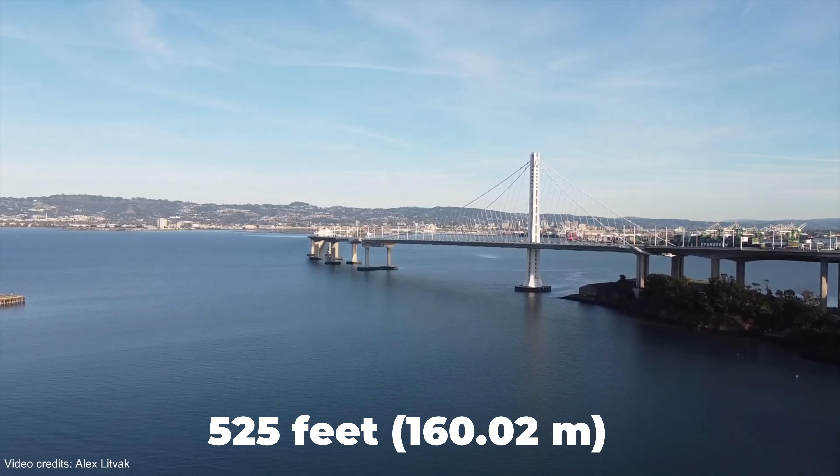California spent $6.5 billion on a single bridge, and it's impossible to miss. That massive 525-foot white tower over San Francisco Bay. It took 11 years to build, and it's the most expensive public works project in California's history.

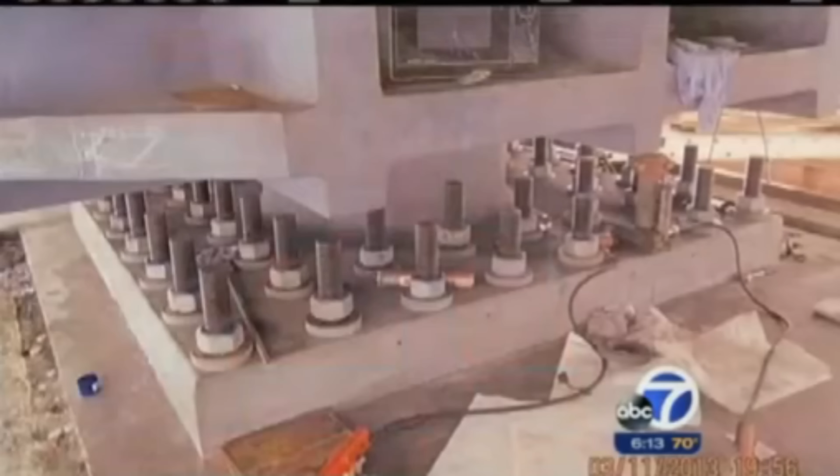But this bridge wasn't built for aesthetics. It had one high-stakes job: to stay standing when one of the most dangerous fault lines in North America finally snaps. But here's the secret. Before the first car even crossed it, components specifically designed to prevent a collapse were already breaking. California knew, but they opened it anyway.

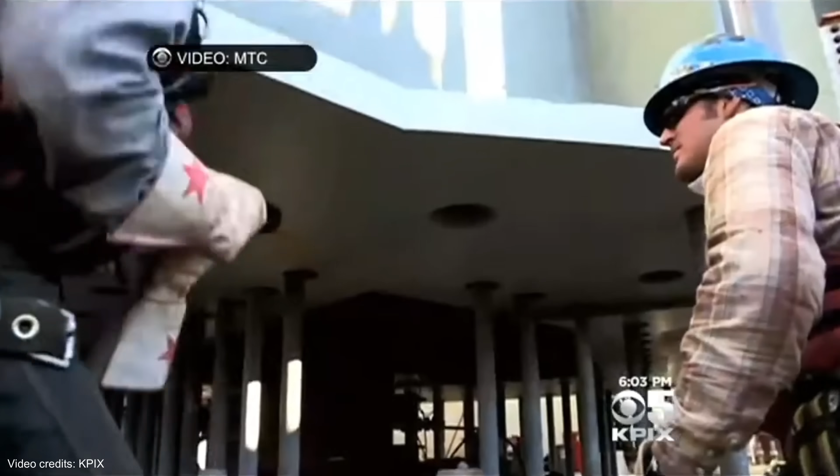Since then, the bridge has kept failing in ways no one predicted. This is the story of how the most expensive bridge the US ever built became a project California can't stop repairing, and the structural gamble that's still sitting right under your tires.

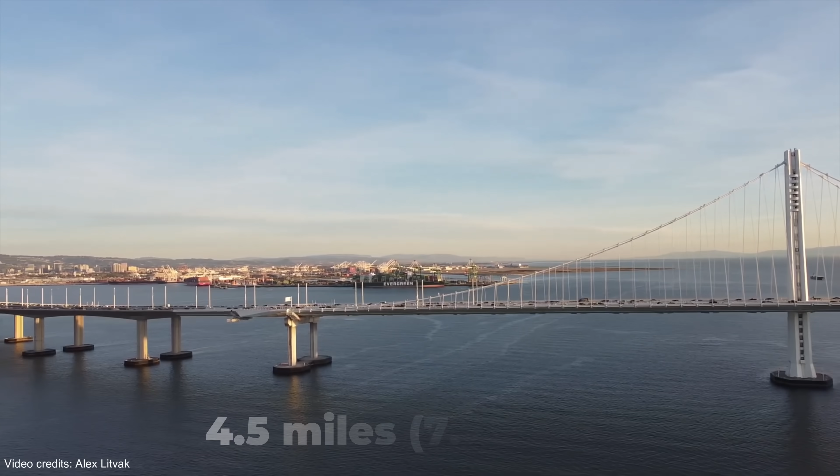Most people have heard of the Golden Gate Bridge, the red towers, the fog, the postcards. But the Bay Bridge is the one the region actually runs on. It connects San Francisco to Oakland across the San Francisco Bay, carrying Interstate 80, the main highway artery of the entire Bay Area. 4.5 miles long, 10 lanes wide, more than 270,000 vehicles cross it every single day. More daily traffic than the Golden Gate.

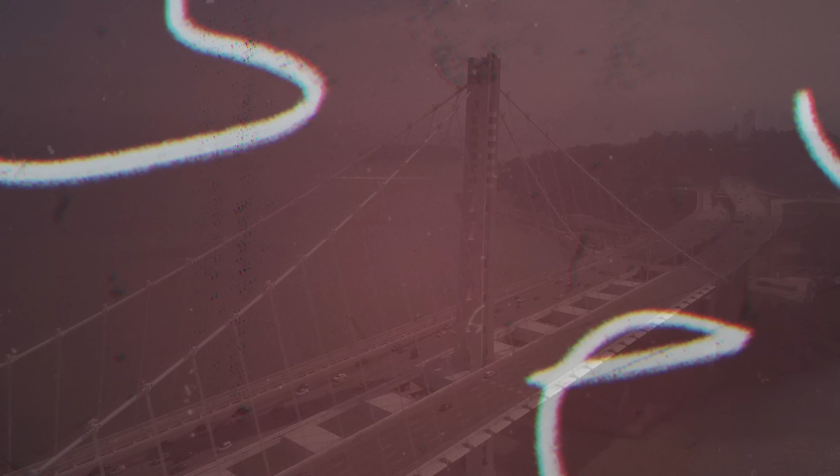The Golden Gate is the icon. The Bay Bridge is the lifeline. Guinness has the paperwork. It's the world's widest bridge. Here's the number that sets everything up. In 1992, engineers estimated it would cost between $150 and $250 million to seismically retrofit the eastern half.

The final bill came out to $6.5 billion, a 2,500% increase, enough money to build approximately 26 full-size bridges. California spent all of it on one span, 2.2 miles. And if you've ever driven this bridge, you've been part of that bill. Tolls went from $1 in the 1990s to $8 today. 30 years of Bay Area commuters paying for it, crossing by crossing.

The bridge has two halves. The western section, the old suspension span built in the 1930s connecting San Francisco to Yerba Buena Island, was retrofitted and kept. The eastern half, running from Yerba Buena Island to Oakland, is what was torn down and rebuilt from scratch. The single white tower you recognize in every photo, that's the eastern span. That's what this story is about.

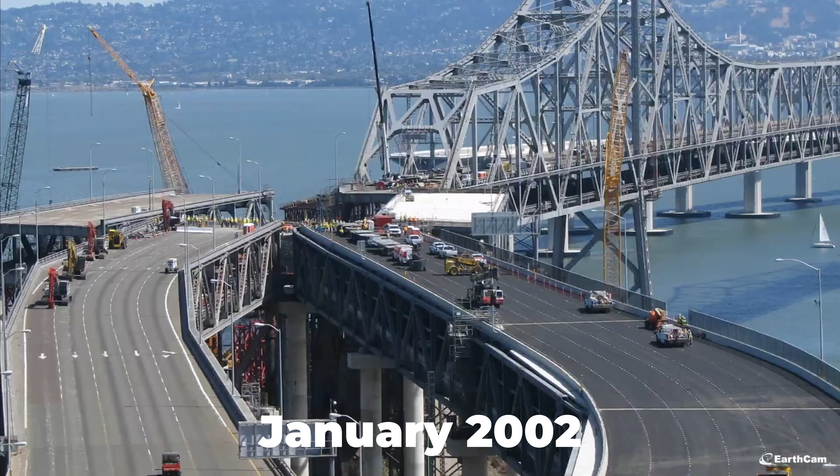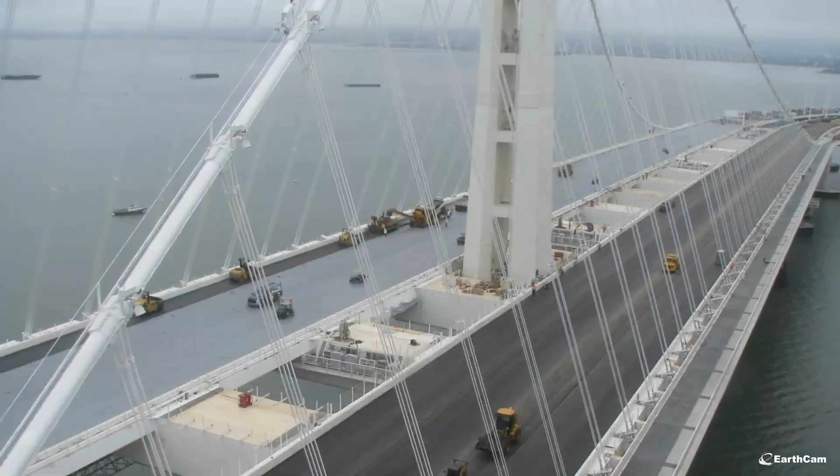Construction started January 2002. It was supposed to open in 2007. It finally opened September 2, 2013, 6 years late, billions over budget, and already carrying a problem that would not make the press releases. But to understand how a bridge this expensive could fail this badly, you have to go back to the night it all became necessary.

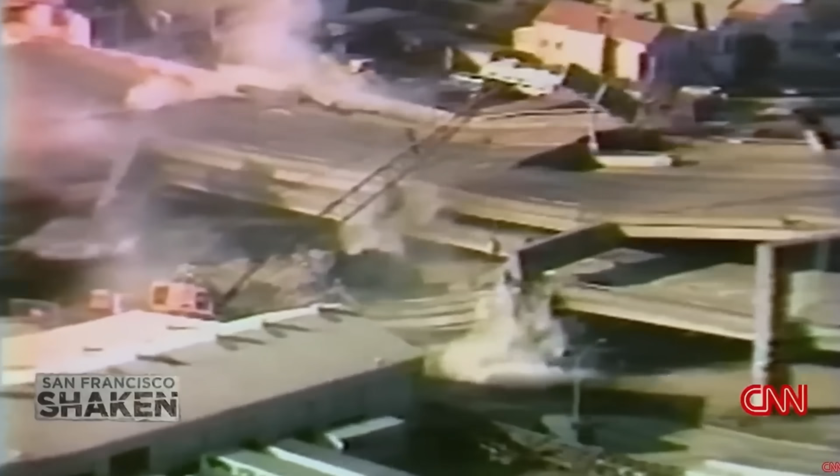October 17, 1989, 5:04 in the evening. The Loma Prieta earthquake hits, magnitude 6.9, epicenter 60 miles away in the Santa Cruz Mountains. Not even close to the Bay Bridge, but a 50-foot section of the upper deck of the old eastern span snaps and collapses onto the lower deck. One person is killed. The bridge goes dark for a month.

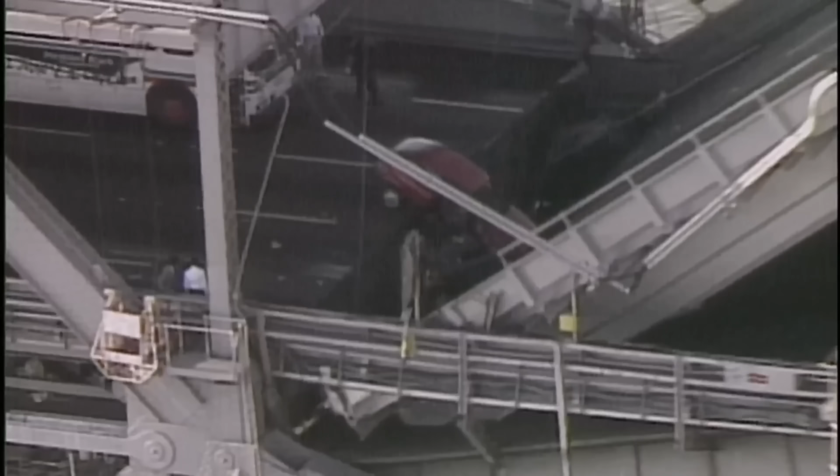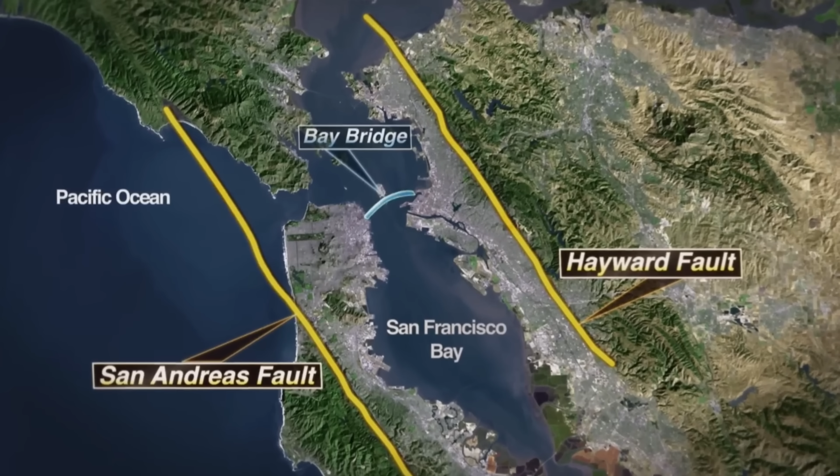But the terrifying truth came later. Engineers realized the entire structure had been seconds away from a total, catastrophic collapse. The Hayward Fault runs directly under Oakland. It's one of the most dangerous urban fault lines on Earth. In 1999, seismologists put the probability of a major Bay Area earthquake at 70% within the following 30 years. That window is still open.

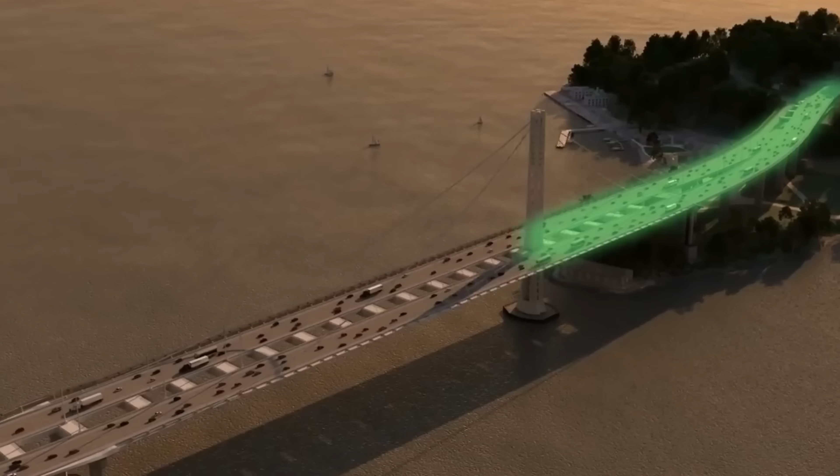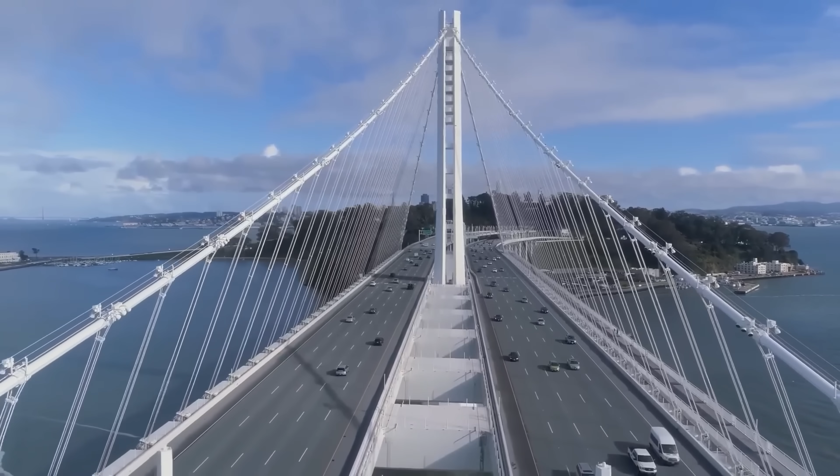The decision was about survival. Retrofit wasn't enough. The eastern span needed full replacement, designed to survive the maximum credible earthquake over a 1,500-year period and keep emergency vehicles moving within 24 hours of an 8.5 magnitude event. So how do you spend $6.5 billion building a bridge that survives the next earthquake and end up with broken earthquake components before it ever opens?

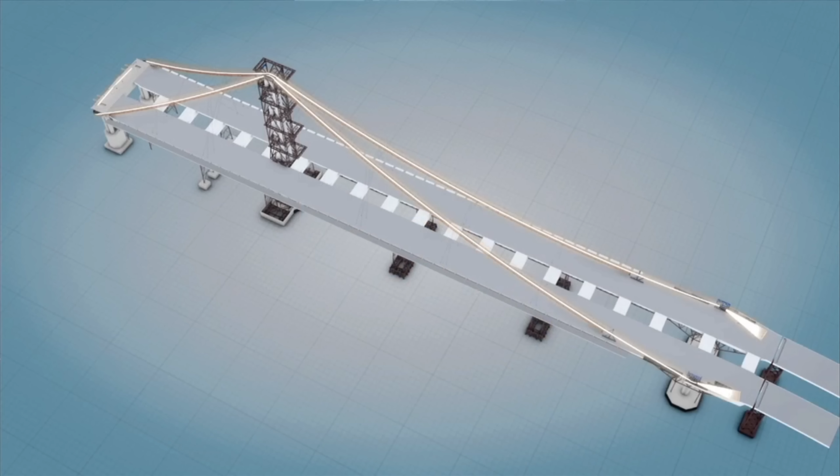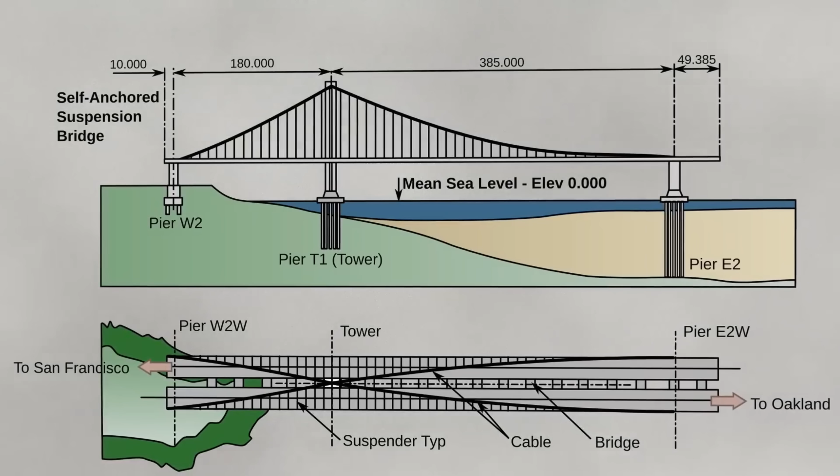The decision to rebuild was about survival. What happened next was about something else entirely. The new eastern span uses a self-anchored suspension design, or SAS, a single asymmetrical tower 525 feet tall. Usually, suspension bridges have massive cables anchored into the ground on both banks, but this one is different.

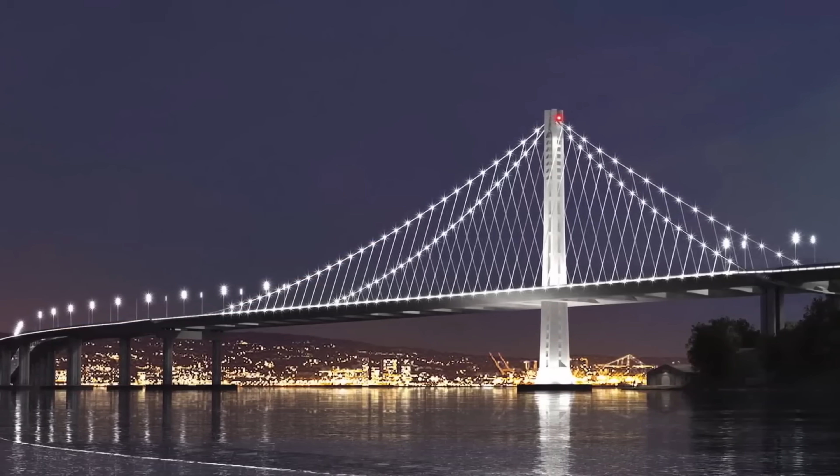The main cable anchors within the deck itself, so the deck absorbs all that tension through compression. It was a structural system that had never been attempted at this scale anywhere in the world. When it was finished, it was officially the longest single-tower SAS bridge ever built.

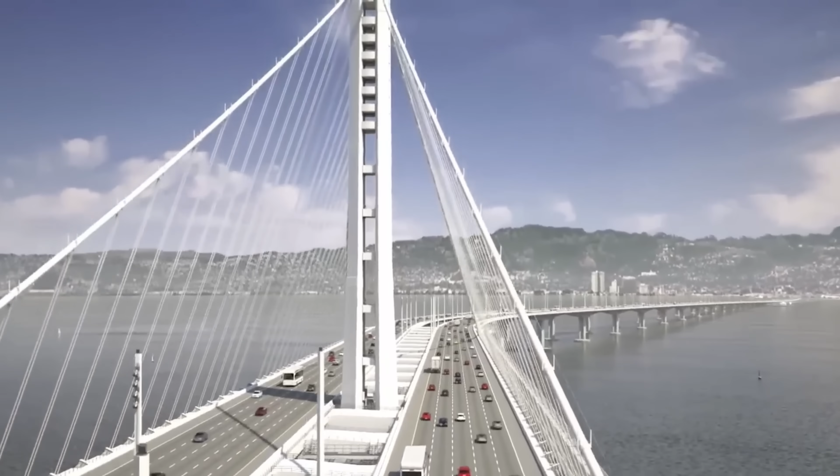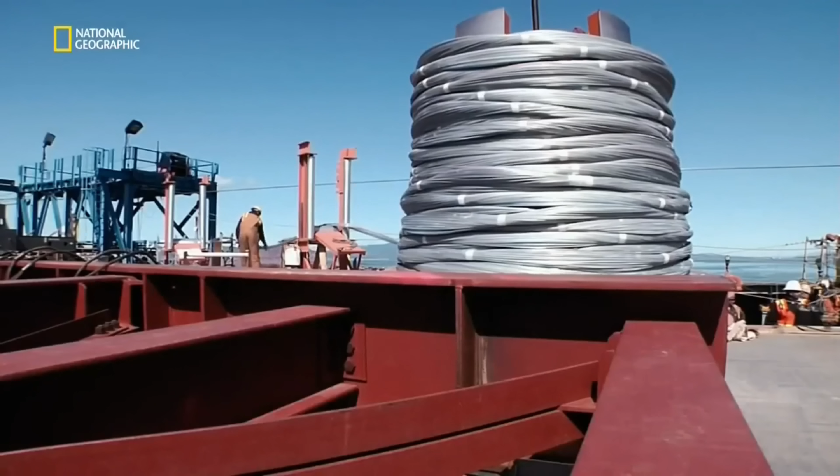The main cable alone is made of 137 prefabricated bundles, each nearly a mile long, over 17,000 individual steel wires weighing 10.6 million pounds total. Why go experimental? The Oakland side geology was a problem. Deep bay mud made traditional anchor blocks enormously expensive.

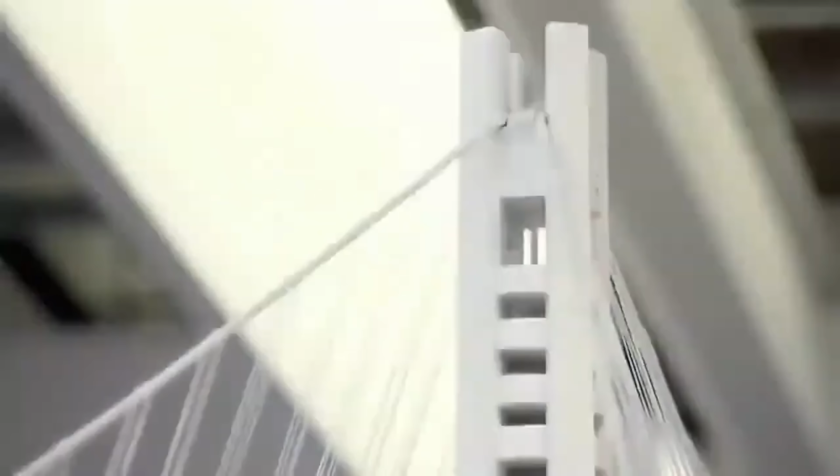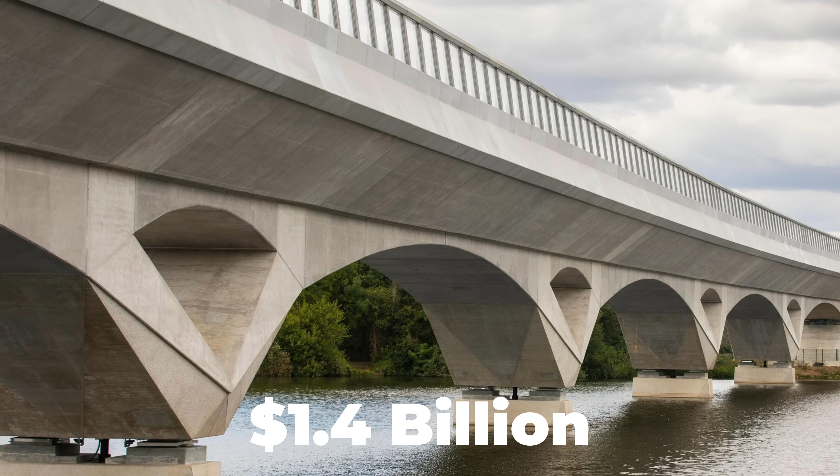In 1998, this design won a public competition. People wanted a landmark. And that's where Governor Schwarzenegger enters the story. The original plan was a straightforward concrete viaduct, $1.4 billion, safe, functional, and totally unremarkable. Critics called it a freeway on stilts. When Schwarzenegger's administration took over, the push for an architectural statement hit high gear. The SAS tower became the centerpiece.

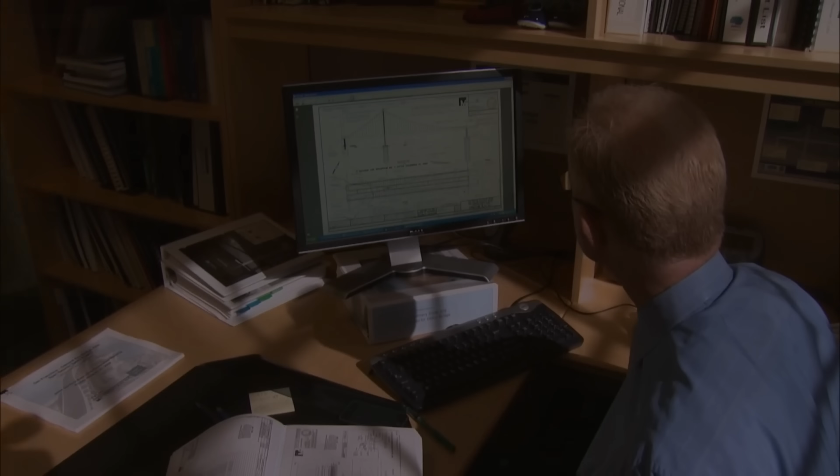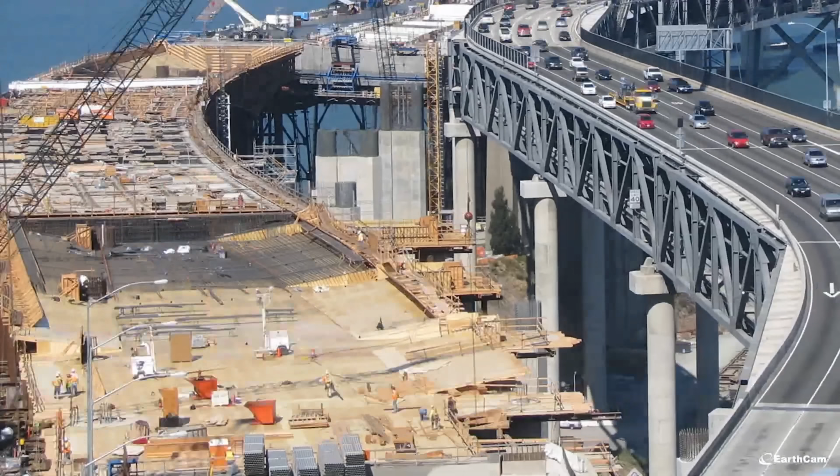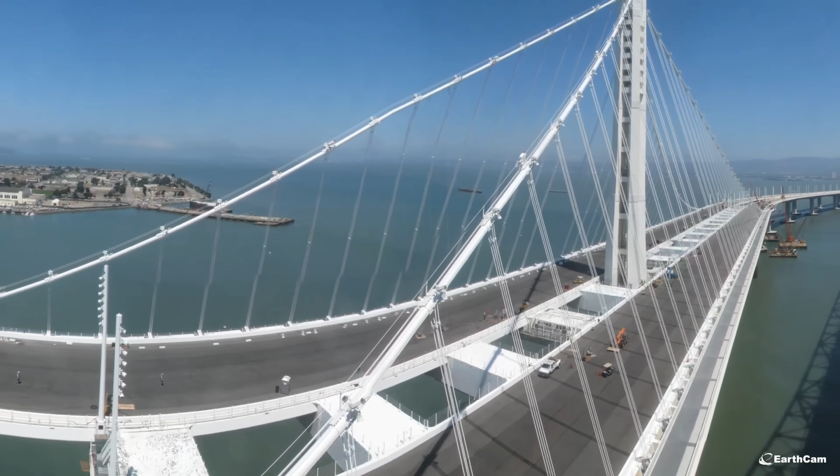Engineers raised red flags. They warned this design had never been built this big, that it would cost more, that it would take longer. And they were right. The price tag started at $1.4 billion for the simple plan, jumped to $2.6 billion once the SAS design was picked, hit $5.1 billion by 2005, and finally landed at $6.5 billion. To be fair, voters greenlit the signature span in a 2000 ballot measure. People wanted a skyline-defining icon.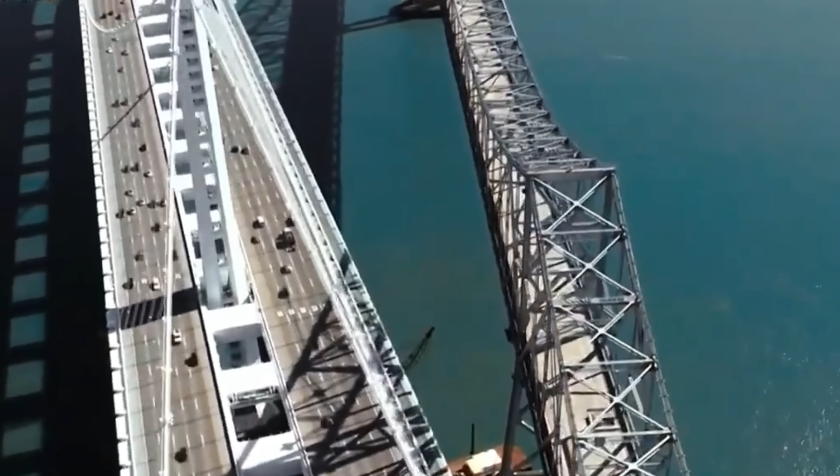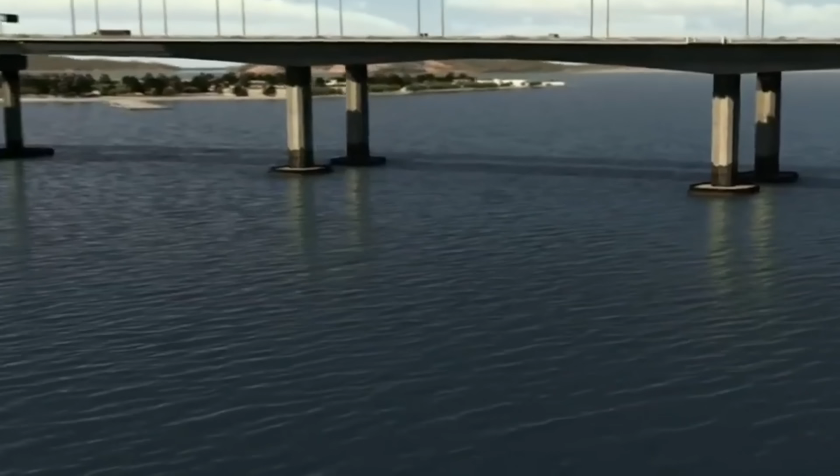There was one more thing that got traded away when that decision was made: transit. The old eastern span carried trains. The new one has no rail capacity at all. That option was gone the moment the signature span was chosen. But the design wasn't the only choice that sent costs into the stratosphere. By 2004, the pressure to save money was reaching a breaking point, and that led directly to the next decision, the one that still makes people the most angry.

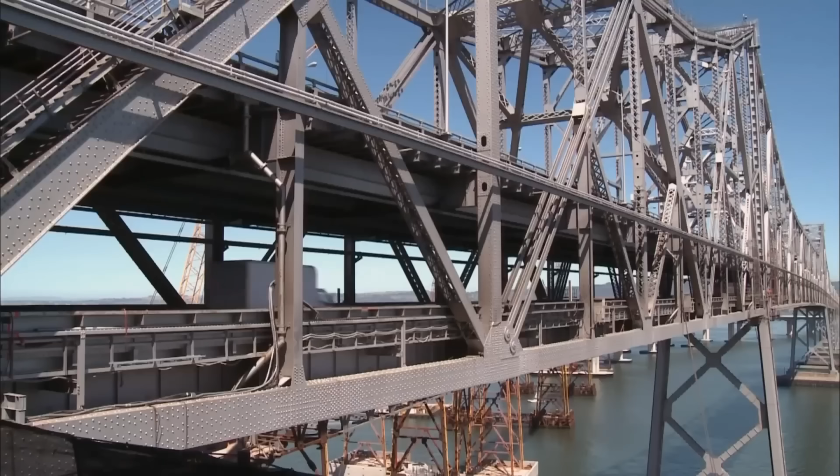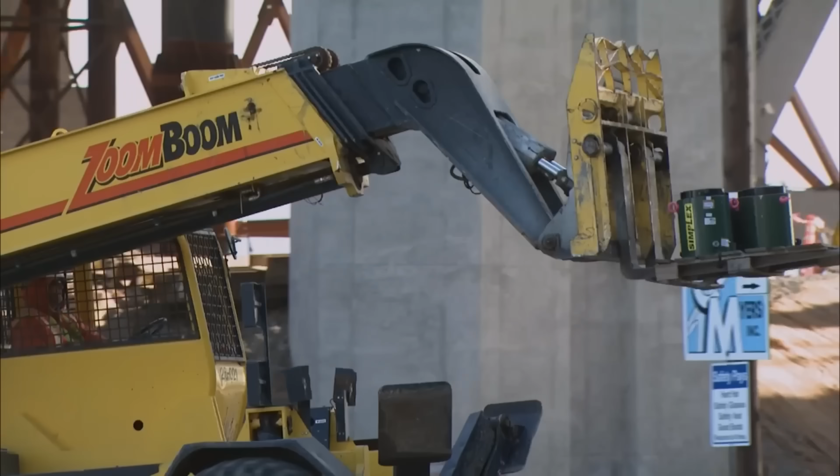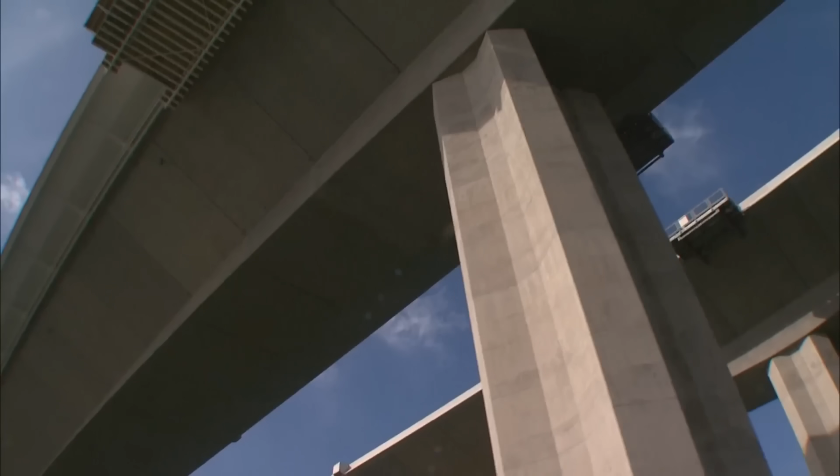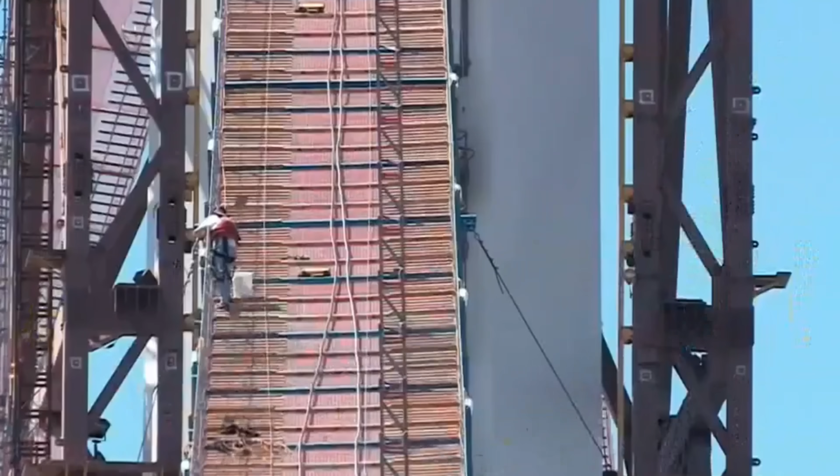By 2004, billions over budget, the state needed to cut somewhere. They chose to outsource the steel fabrication to China. They picked ZPMC, a state-owned Shanghai company that dominated the global market for port cranes. One problem? They had never built a bridge. Caltrans' own auditors flagged them as high risk. They gave them the contract anyway. $350 million. 50,000 tons of steel. The 525-foot tower arrived by cargo ship in 2010, built by a company that had never constructed a bridge.

Before it even shipped, 15 former welders and inspectors went to the FBI. Their claim? Workers were being rushed so hard that up to a third of the welds were defective, covered up, re-welded on the surface, buried in concrete. Some of those welds are now underwater. They can never be inspected. Caltrans said it was impossible to hide bad welds from their inspectors. Tests came back clean. The FBI investigated for 8 months and closed the case without charges. The inspectors didn't back down.

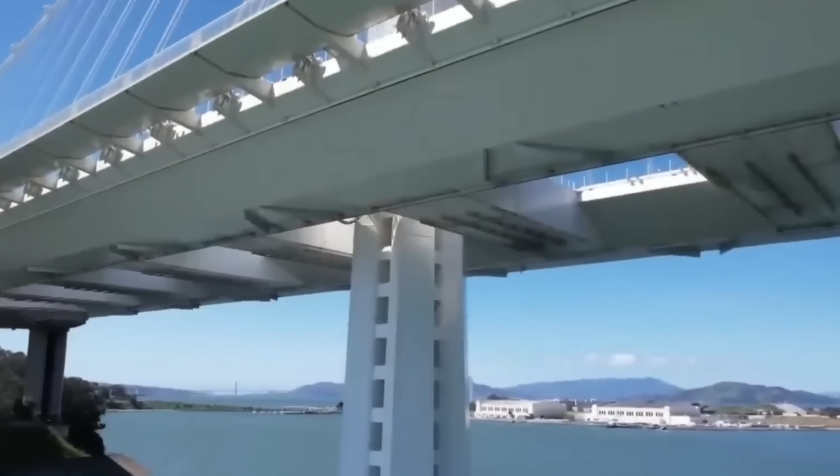A California State Senate review later found that Caltrans had waived welding code requirements to accept ZPMC's cracks, calling it engineering judgment, and that managers had removed or demoted at least 9 engineers who tried to speak up. The project lead, Tony Anziano, was named in that report. He retired in 2015. No charges, no discipline. Caltrans' own head of materials testing testified that ZPMC treated requirements like suggestions. Independent UK experts concluded the cracking indicated serious disregard for procedure.

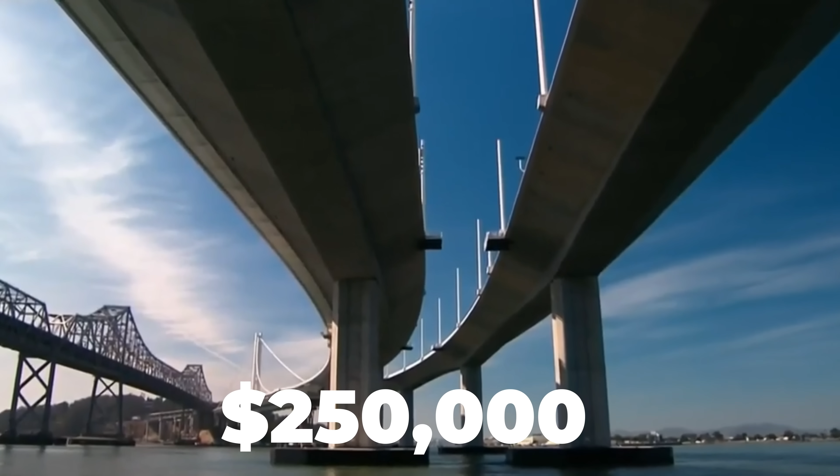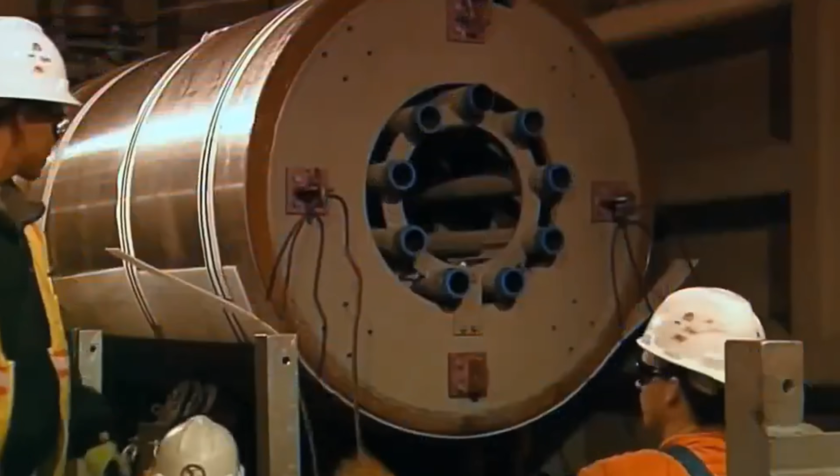Before any of this unraveled, a contractor offered Caltrans $250,000 worth of equipment to inspect exactly these kinds of welds. Caltrans said they didn't need it. The problem it might have caught cost hundreds of millions to fix, on a $6.5 billion bridge built for one purpose. No one went to jail. The savings evaporated. So many welds had to be ground out and redone on site that the cost-cutting move ended up costing more than it saved.

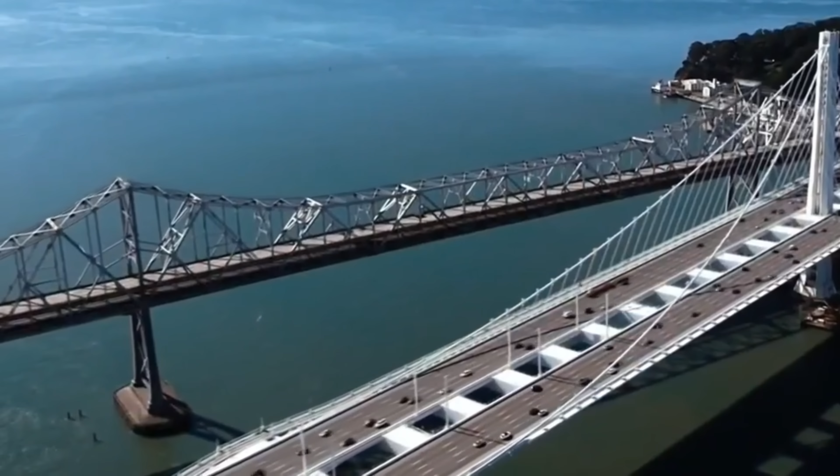The tests were clean. The case is closed. The workers who saw those welds still say it was a cover-up. The bridge opened, the speeches were made, the $8 toll kept coming. The weld story was over, but the bridge was about to reveal a completely different failure.

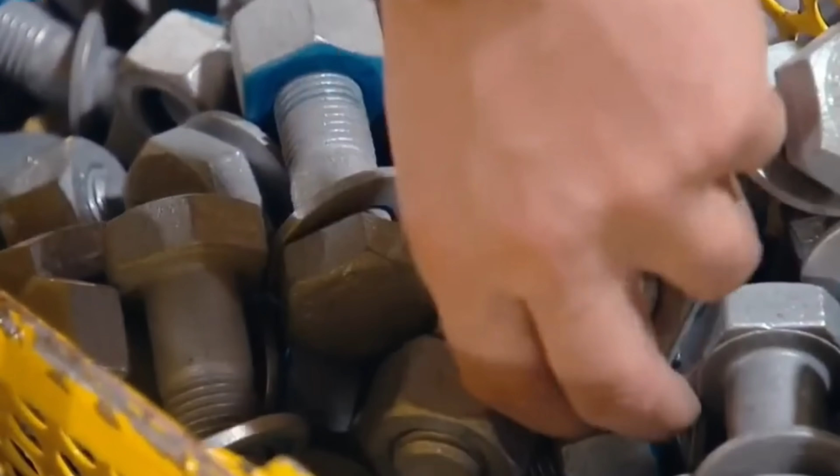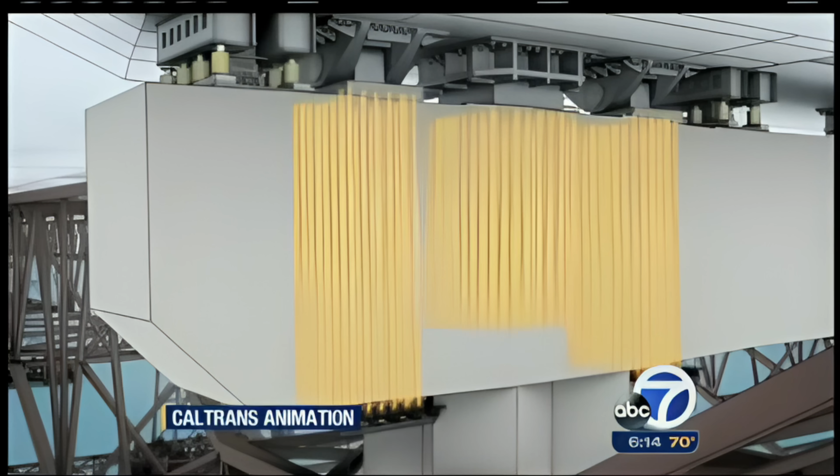It's March 2013, 6 months away from the hyped Labor Day opening. Workers start tensioning the anchor rods for the shear keys, the components that keep the deck from sliding sideways during a quake. One job. But as they start tightening them, 32 of the 96 rods snap, fracturing at the base. Workers had to abandon all 96, embedded in the concrete forever. The cause? Hydrogen embrittlement. The rods were installed in 2008 and left exposed to salt air for 4 years.

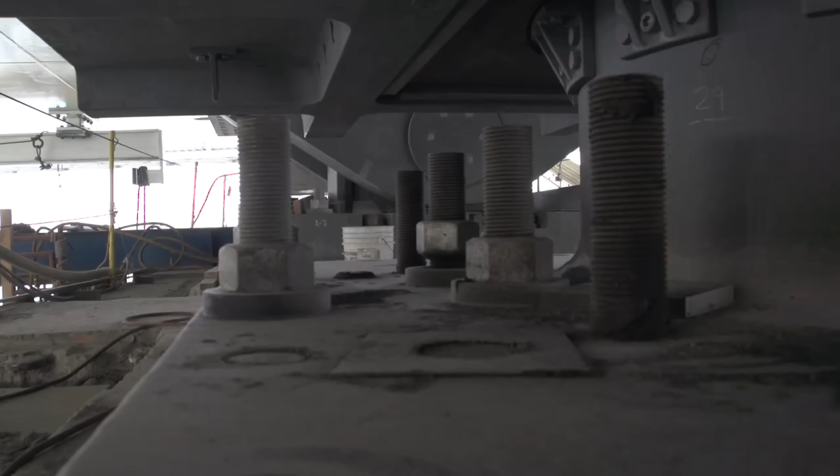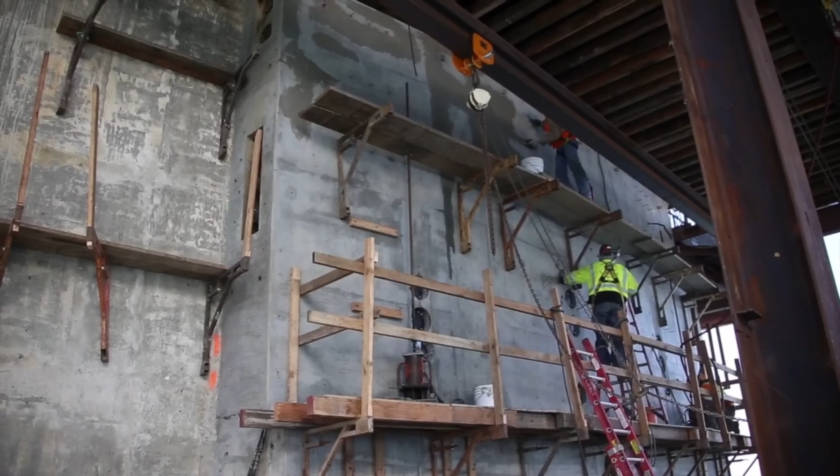The steel soaked up hydrogen, became brittle, and when the pressure was applied, it gave way. The warning wasn't vague. Bridge engineering standards had already flagged this rod type as unsuitable for wet, salt air environments for exactly this reason. That prohibition was on the books before the first rod was ever ordered. Those 32 broken bolts are now permanent.

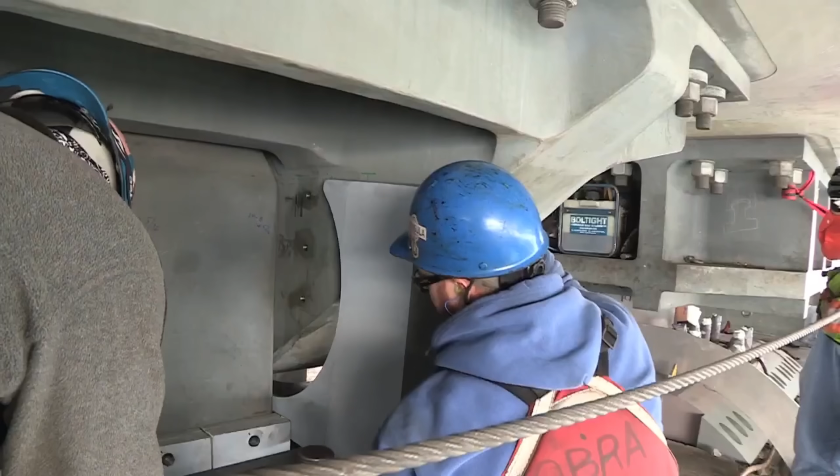The state's workaround? A $5 million saddle system, a giant clamp to do the job the rods couldn't. The bridge opened September 2nd, 2013 on schedule. The saddle fix? Not $5 million, $25 million. Caltrans says the bridge is safe.

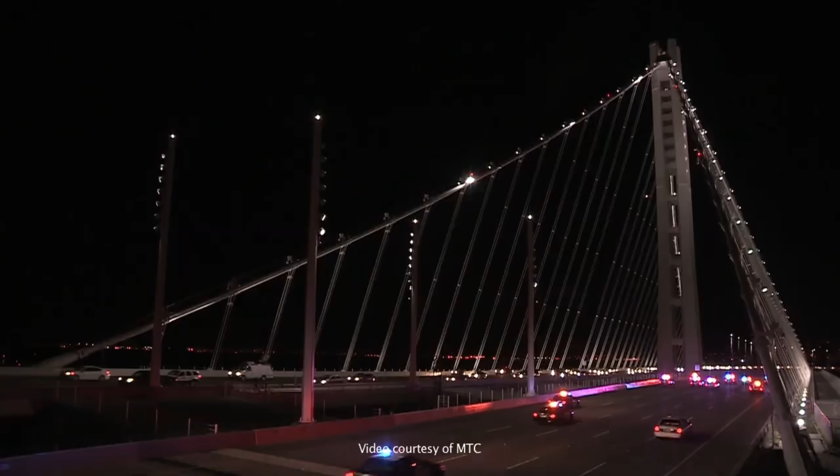Dr. Abolhassan Astaneh-Asl from UC Berkeley disagrees. He's called it fracture critical. One major piece fails, the whole thing goes. He was surprised the federal government approved the fix at all. 270,000 people cross this bridge every single day. Almost none of them know what's in the concrete beneath their tires.

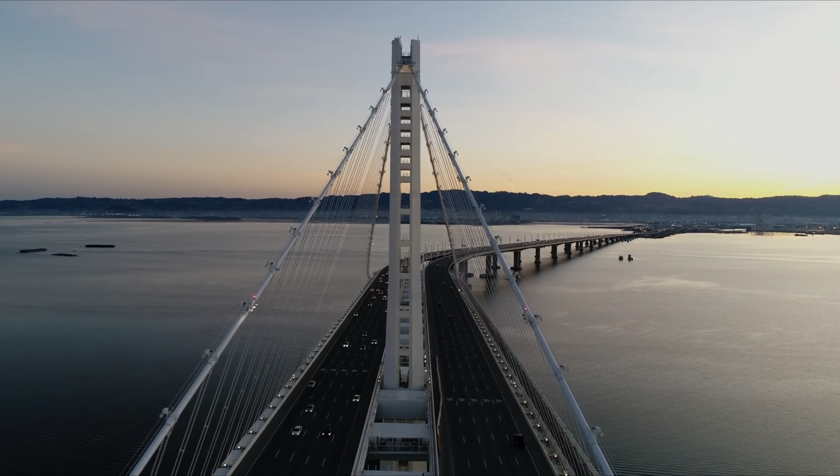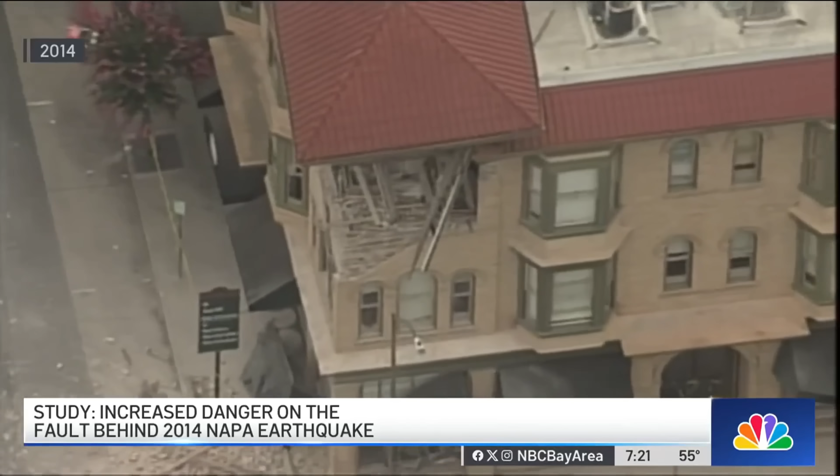11 months after opening, the bridge had its first real test. In August 2014, the largest Bay Area earthquake since Loma Prieta hit, magnitude 6, centered near Napa. The eastern span shook. It held, with no reported structural damage. But a 6 on a distant fault is not a Hayward scenario. The bridge passed its first real shake, just not the one it was built for.

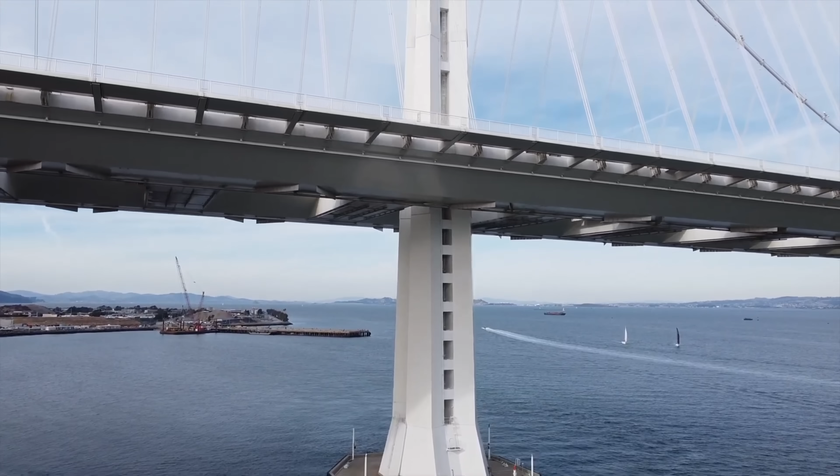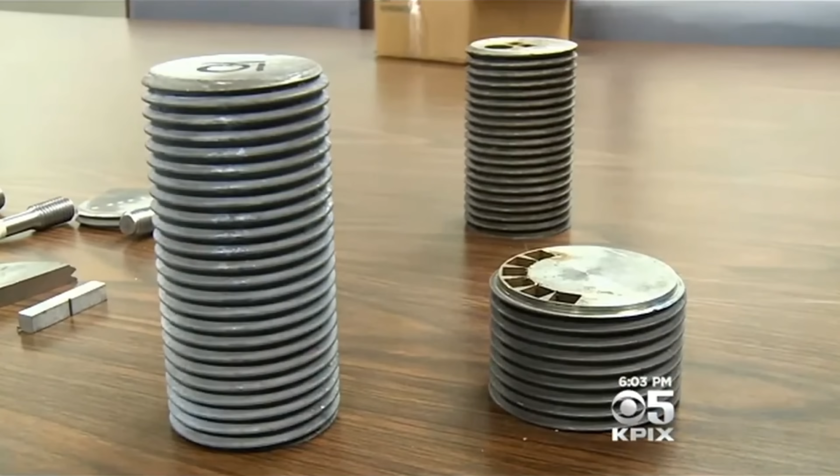In 2015, engineers found standing water in 95% of the conduit sleeves holding the tower's 424 anchor rods. They also found that 135 of those rods were never properly grouted because one contractor thought another had already done it. The fix? Seal the leaks and install massive dehumidification systems to keep the rods dry. But here's the catch. For this bridge to hit its 150-year design life, those dehumidifiers have to run perfectly without failing for the next century and a half.

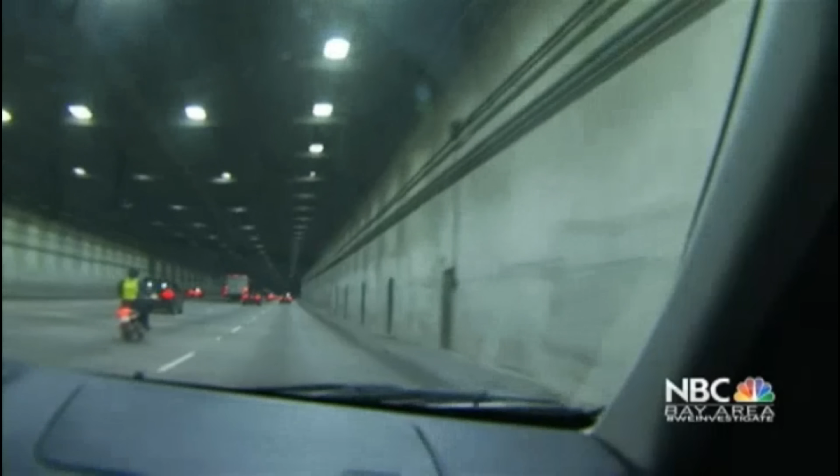Then, in 2016, a chunk of concrete the size of a car tire fell from the ceiling of the Yerba Buena tunnel below. It blew out a driver's tire and narrowly missed causing a massive accident. Caltrans eventually found a dozen other spots where corrosion was literally eating the concrete away.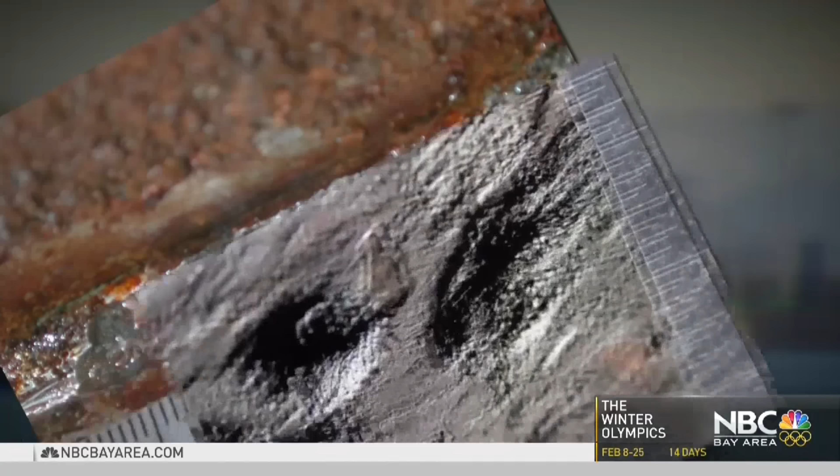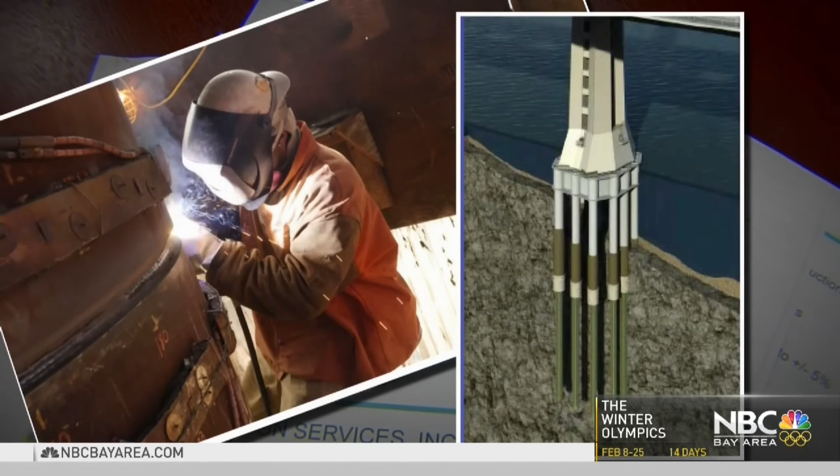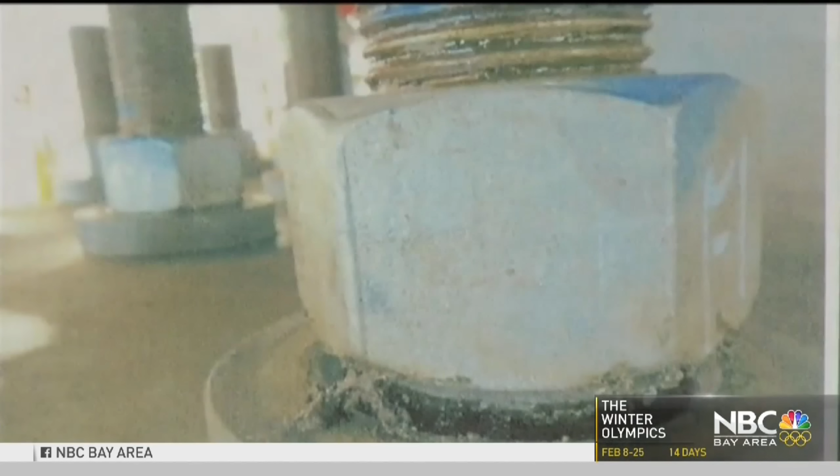And in 2018, they found something even stranger: microbial corrosion. Basically, marine bacteria in the bay are producing acid that's eating into the steel foundations. The lead engineers admitted that if this keeps up, the bridge won't be what they assumed it would be in 150 years. It feels like every year or two there's a new finding. It's a brand new bridge that's already acting like an old one.

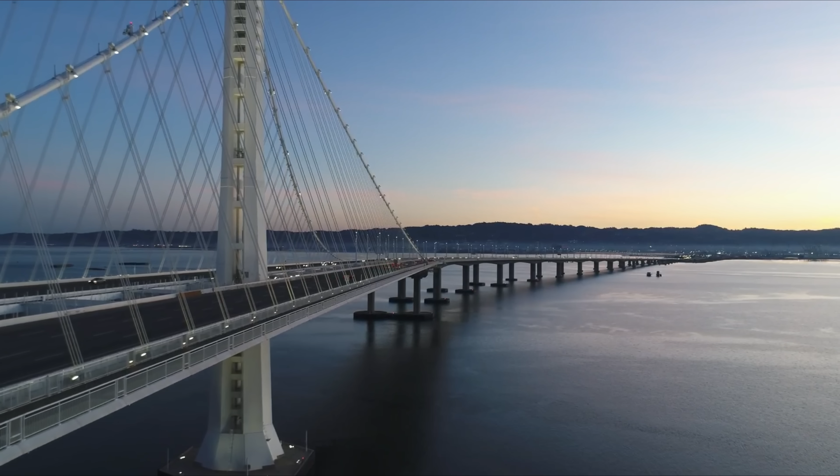So, where are we now? The shear key rods, the 32 that fractured before opening, are still embedded in the concrete. They cannot be removed. The $25 million saddle system is now the permanent solution. Caltrans' official position is that the seismic function has been fully restored. Independent engineers say the replacement system works differently than designed, and its performance in a major earthquake has never been validated by a real-world test.

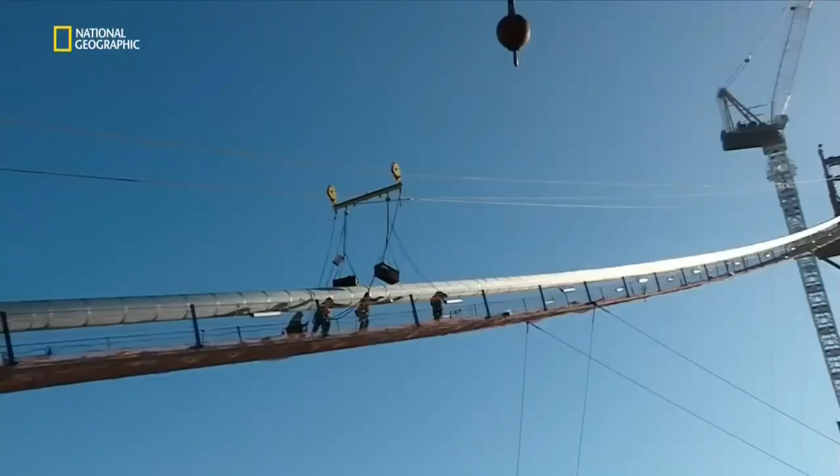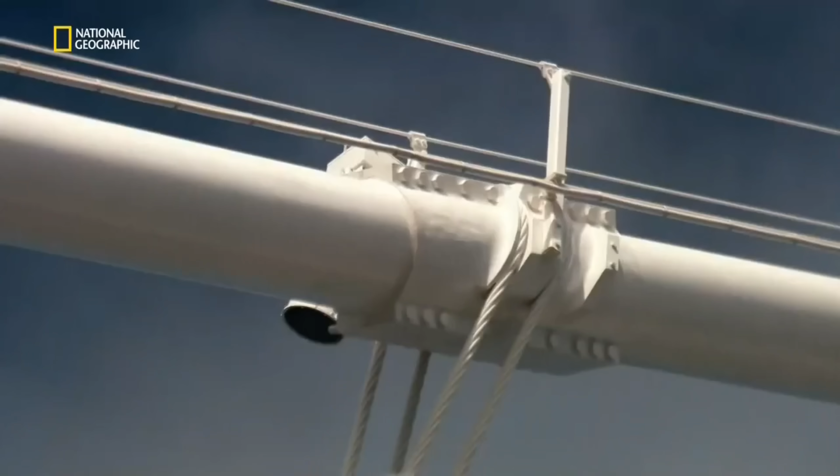The 424 tower anchor rods, the ones holding the 525-foot tower to the bay floor, are being managed through dehumidification systems installed inside the conduit sleeves, designed to keep moisture out and stop embrittlement before it starts. That fix works as long as those systems keep running, without interruption, for 150 years. The microbial corrosion and tunnel concrete issues remain under active monitoring. No projected end date for either.

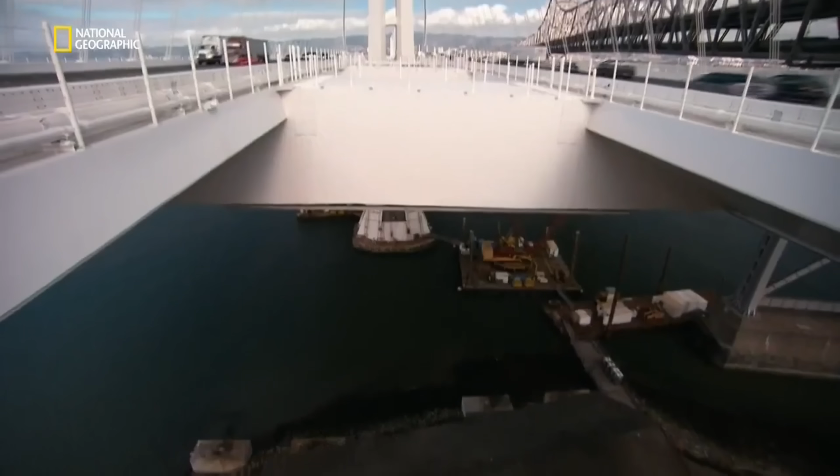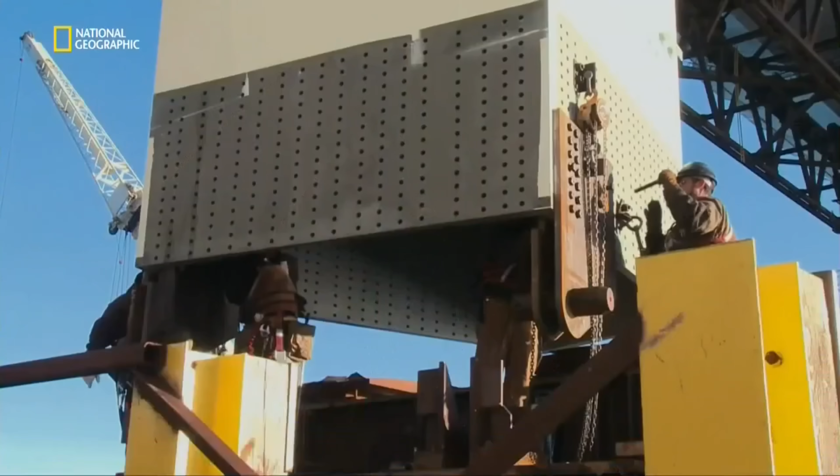Meanwhile, in 2024, Caltrans opened up the western span's main cables for the first time in 90 years to check for internal corrosion. And the results of that examination still haven't been published. In July 2024, Caltrans published its most recent formal assessment of seismic safety across California's bridges. The Bay Bridge eastern span, 12 years old with broken bolts in its concrete and unresolved engineering disputes in the literature, is not specifically addressed.

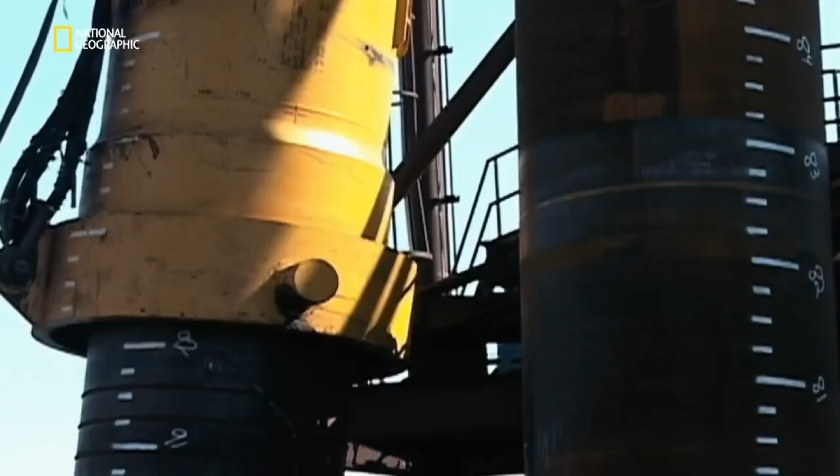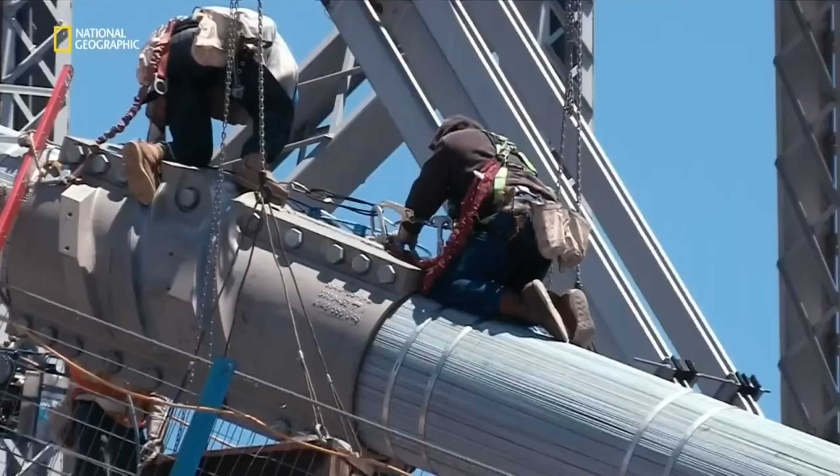And the Hayward Fault is still out there, and seismologists put the odds of a major rupture on that specific fault at 33% before 2043, a fault-specific estimate separate from the broader regional countdown. In 2014, 11 months after opening, a 6 hit near Napa. The bridge shook and held. But a 6 on a distant fault isn't the test this bridge was built for. The Hayward Fault doesn't send warnings from 30 miles away. When the ground finally moves, what do you think happens?